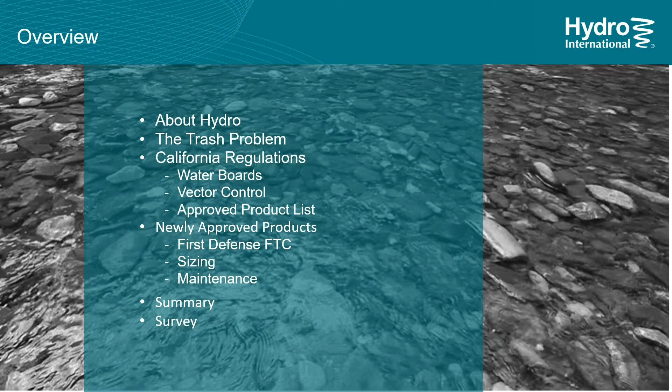So just a brief overview of what I'm going to cover. I'm going to talk about Hydro International, who we are, what we do. We're going to talk about the trash problem in general, and again, those are the slides that maybe you might have seen if you attended the webinar last year. But then we're going to jump specifically into California regulations, what the California Water Board is doing, as well as vector control approved products on their approved list for meeting the trash provisions. I'm going to talk a little bit about our newly approved products that we have with Hydro International with the state of California, about sizing and some of the changes that are being done with the state and how they like to see things sized, and obviously talk about maintenance, because any of these products that we talk about do need to be maintained in order to be functioning properly.

So Hydro International, we're really a water management company. I deal in the stormwater division, but we do have a wastewater division. We also have an industrial division. So if you have any projects that fall under those categories, feel free to get in touch with me. I can put you in touch with my colleague, the appropriate colleague that covers that segment of the industry.

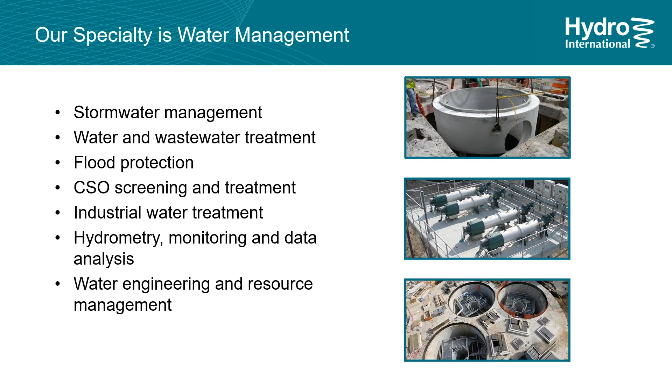We're truly an international company. We have installations all over the world. We have multiple locations of hydro offices as well. Our corporate offices are based in the UK, but for America's Stormwater Division, we're based out of Portland, Maine, and we have our wastewater division all the way across the United States, just outside of Hillsboro, Oregon.

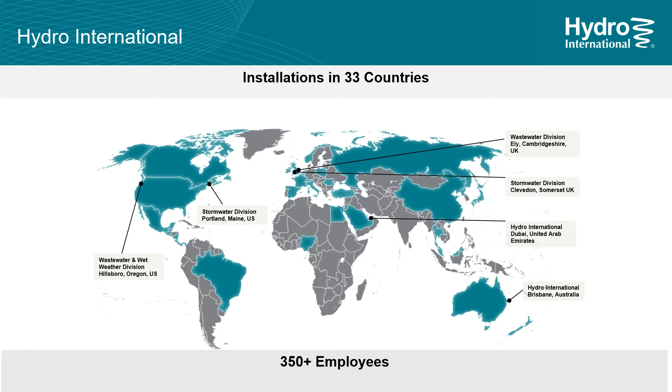One of the things that separates Hydro International from all of the other companies is we're really a water treatment company first, and we develop all of our own technologies in-house. We continue to improve on our products and work in our world-class laboratory to come up with new products and improve on our existing products in order to help you with your water quality needs.

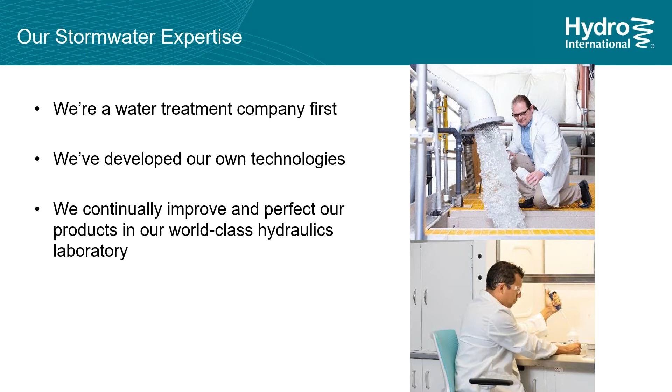We have a vast array of different stormwater devices depending on what your regulatory requirements are and or the pollutants that you're going after. This is just kind of showing you all of them, but specifically today, the pollutant we're going to be talking about is trash.

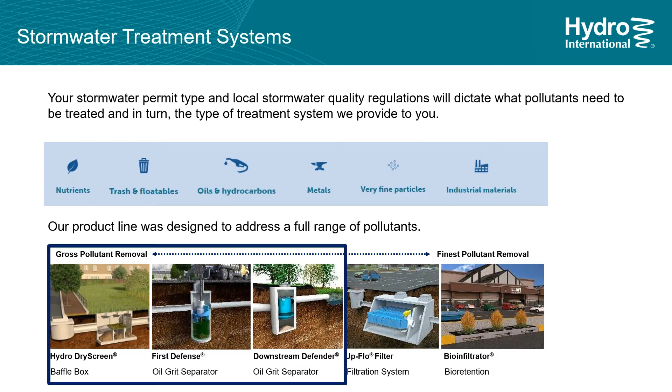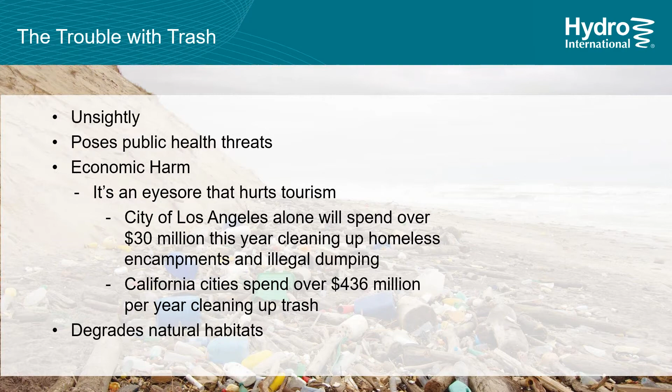Now, these are some of the slides that maybe you'd seen if you joined me for the webinar a year ago on trash, but I just want to go through the problems with trash. Obviously, it's a very unsightly thing. None of us like to see trash on the sides of the roads or in our communities. It can pose public health threats, and obviously it's a huge economic harm to cities and the state. How much does it cost us each year for us to be able to clean up all of that trash? Just an example, last year, the city of Los Angeles spent over $30 million cleaning up homeless encampments. And the state of California, when you combine all cities and their costs, is over $436 million per year in cleaning up the trash.

So it's obviously a very big problem that we do need to address and think about. None of us like to see any of these types of pictures. We know that one of the main things that gets into the ocean is plastics, and everything that we can do to capture trash on land and avoid it from getting into the waterways is obviously going to be a good thing. Some of the not-so-fun facts about trash, and I hate reading these, but it is a problem and it's something to be addressed. We've produced over 18 trillion pounds of plastic since the 1950s. That equals the size of 1 billion elephants, and that's pretty horrific when you think of it that way.

18 billion pounds of trash ends up in the ocean each year, and out of that, 70% of it is actually plastic. And 80% of that trash originates on land. So everything that we can do to capture that trash on land before it gets into waterways, before it gets into the ocean, is obviously the best thing that we can possibly do.

It's estimated that by 2050, there'll be more plastic in the ocean than fish. I'd like to think that all of us can definitely avoid that by doing what the state of California is doing, implementing trash programs to capture it on land and avoid it from getting into the waterways.

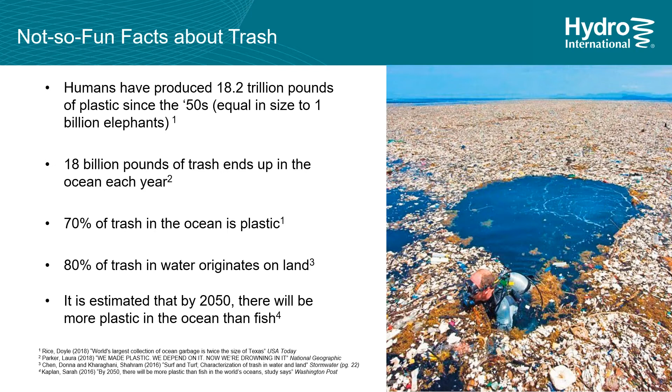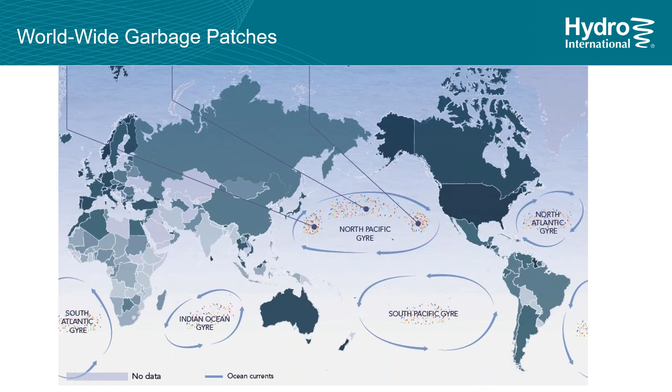Now, we have 5 garbage patches throughout the world that I'm sure you've all heard and read about, but the one we think about here in California is the Great Pacific Garbage Patch between California and Hawaii. That's grown significantly over the years, and at this point it's actually twice the size of Texas.

So it's a significant problem, something that needs to be addressed, something we need to think about in terms of how we're going to clean that up. Luckily, this young man from the Netherlands, Boyan Slat, came up with a pretty brilliant idea for ways we could clean up these garbage patches.

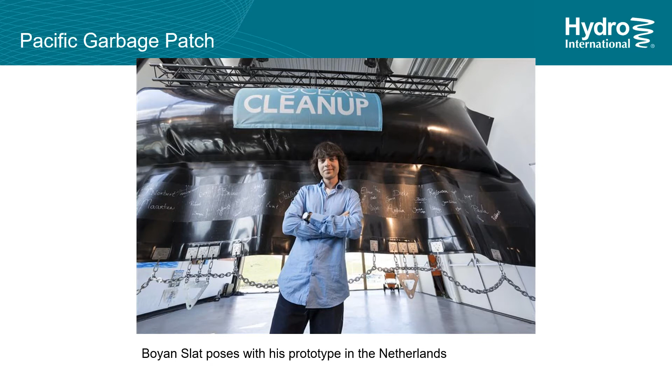You can see his prototype behind him in this picture. It's almost like a big inflated tube with a long hanging skirt underneath it, and you can see the chains and weights holding it down. That's basically to try to corral these large garbage patches and have a way for us to clean it up. But as much as it's a great idea, brilliant for the kid to come up with, there were definitely some problems.

When they launched the deployment of these devices, he had 60 devices at a cost of $360 million. So it's not a cheap proposition. And what looks good on paper might not necessarily be exactly what works in the real world.

When they launched these, they had some failures. They found that the turbulence of the ocean and the winds they get out in the middle of those channels were just too severe for it, and it broke apart.

When they went out after about 3-4 months of it being deployed, they found that a lot of it was broken apart. The other thing they found is that it was designed to move with the currents just like the plastics, but they found the plastics were actually moving faster than his device.

So back to the drawing board they've gone. They're trying to do some tweaks in the design. Hopefully they'll come up with something that can be used to get all that plastic corralled and out of the ocean.

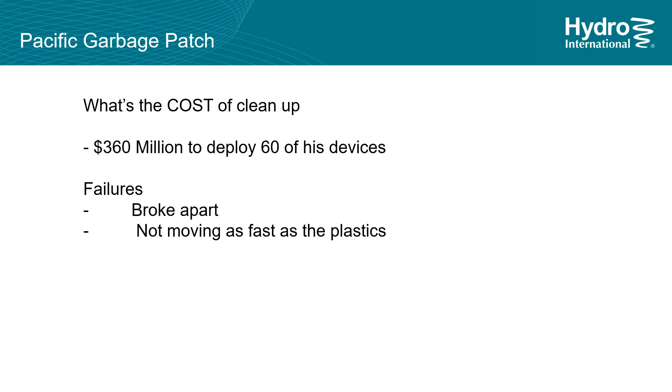So now I'm going to jump in. We talked about the problem of trash, and we're all aware of it, but I'm going to specifically start talking about the California trash provisions. But before I go into it, I wanted to launch a poll to have each of you respond to. Let's see if this launches here.

So the poll is: what percentage of your water quality projects have implemented trash provision requirements? Just on a percentage, if you could indicate how many of you are thinking about trash and how much of it is becoming more prevalent in your design and thought process. I'll give everybody a moment to fill this out so we can see what the results are, and just give it a few more minutes here.

Okay, I'm going to close the poll, and then we're going to share the results here. So it's interesting to see: 25%, less than 25%, 50%, and 75 to 100%.

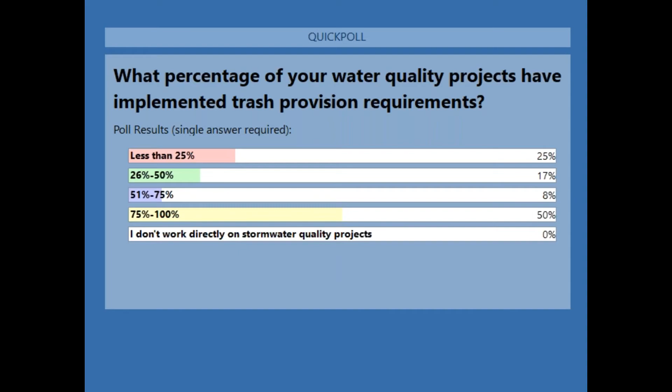That's very interesting to me because I've been doing and talking about trash for about 3 years now, and it seems that when I would do lunch and learn presentations at engineering firms 3 years ago, I would ask this question and pretty much nobody was thinking about it. So this poll really tells me it's becoming more and more on people's minds. People are aware of the new California trash provisions and how that works. Very interesting, I'm glad to see that.

So now we're going to talk about California trash provisions, and based on that poll, I think a lot of you are starting to think about it. A lot of you might be aware of it, but we're going to talk about some of the changes that are happening as things have progressed with this program. So let me get this to advance here. There we go.

Okay, so I'm going to talk about regulatory terminology. From here on out, when we talk about full trash capture, we're going to talk about the trash provisions. That's more really what it is on the state level. One thing not to confuse is TMDLs with full trash capture or the trash provisions by the state water board.

The water boards are generally concerned with basically the first flush event. That's treating the first 1 hour and 1 year storm, and generally it's about a half inch per hour intensity. They know that some trash is going to escape from these systems when they go into bypass mode, but this is not about capturing and holding everything. This is about getting that first flush and meeting the water board requirements.

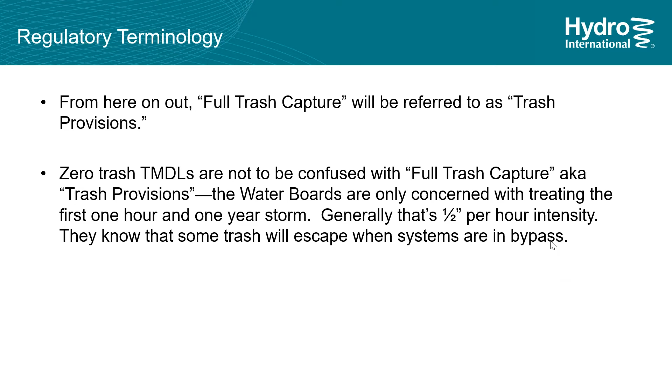This is a timeline for how this trash provision has come about. Back in 2015, new trash amendments were effective, and most municipalities were put on notice that this was coming. Municipalities had to decide which way they were going to go in order to become compliant with the state's trash regulations, picking either track 1 or track 2, which needed to be submitted to the state by December 2018. They don't have to be fully compliant until 2030, but that's when most cities and municipalities started thinking about it and decided which way they were going to go.

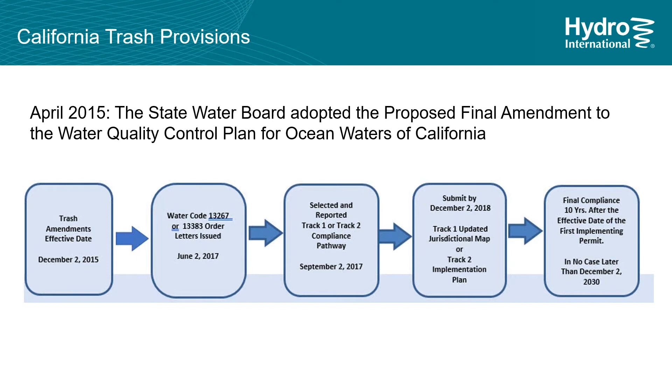When you look at the difference between track 1 and track 2: track 1 is install, operate, and maintain full capture systems for all storm drains that capture runoff from the priority land use in their jurisdictions. That's utilizing full trash capture devices like the ones that Hydro International manufactures. Track 2 is kind of a combination, utilizing catch baskets, inlet filters, maybe our large devices, increasing more men on the street picking up trash, maybe increasing your street sweeping program, that kind of thing. Most municipalities try to figure out what would be most beneficial and cost effective, and they submit that to the state.

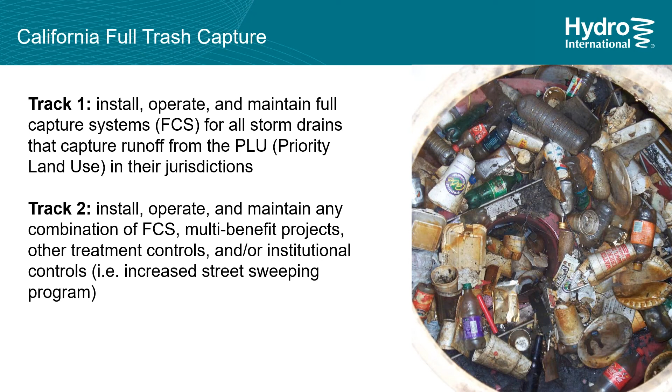Now, when we talk about how this all came about: in the very beginning, when manufacturers filled out an application for their device to be approved by the state, consideration to mosquito and vector control really wasn't done right at the beginning. The state started approving some products without consideration to mosquito and vector control. That's changed drastically. Now, both the state water board and mosquito and vector control are working together for approvals for any devices being applied for. So that's a big change.

We at Hydro International are working very closely with both of them. I'm in contact with vector control, I'm in contact with the state board, and I'm trying to stay on top of all the changes that are happening. As I've told many people, it's somewhat of a moving target right now. Some manufacturers that were grandfathered in and approved way back when might not be approved tomorrow. There are delistings happening off the approved list, so it's very important for you to stay on top of the water board approved list.

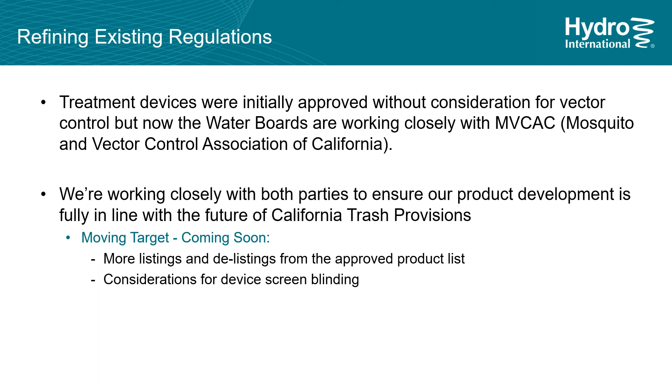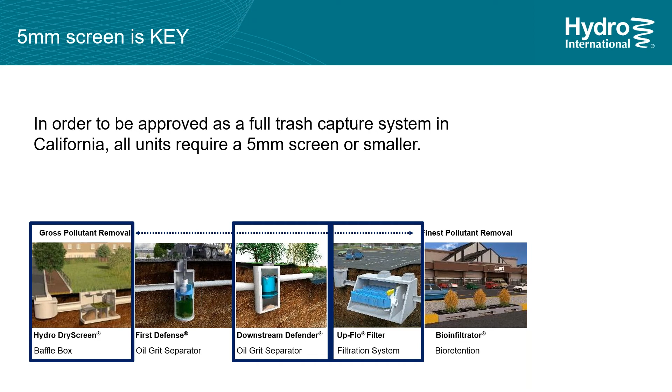The other thing that's changing is they now have considerations for device screen blinding - I'll go into that a bit more - but they're concerned with how these units actually function in the real world once they're not being maintained properly. One of the keys for a product to be approved on the California list is it has to have a 5mm screen. Different devices have different screens, and 5mm is the bare minimum.

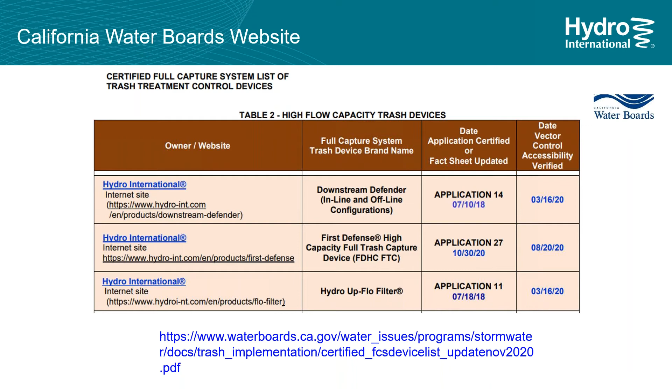Now, if you go to that full list and look at all the other manufacturers, you're going to see quite a number of them with the word 'none' in vector control accessibility. That means they have not gotten vector control approval yet. What the state board is currently doing is sending a letter to each manufacturer that has a 'none' in that category, giving them 60 days to apply to vector control to have their device approved. We'll talk about what vector control does and why that's important. But it's very important for you, when you look at this list, to pay attention to the ones with 'none' next to them, because they might not be on the list in the very near future.

Now, vector control, what they do is they're treating for mosquitoes. The mosquito problem is a big deal. Before I got into understanding all the nuances of these approvals, I wasn't really aware of mosquitoes and how big of a problem it really was. I've learned a lot over the years.

When it comes to approval of a product, it has to be approved by the state, but it also has to be approved by the Mosquito and Vector Control Committee. For approval for vector, it's based on two things: one is treatability and one is accessibility.

In order for the vector people to do their jobs properly and treat for these devices, they don't want to have to climb into a structure and disassemble parts. They don't want to have to lift heavy hatches. They want to be able to pop the manhole lid, look down into the device, and see if there's standing water and mosquitoes, and be able to drop in their pellets to treat the water. So those are the things that are important to them. They don't want to see a device with a big screen blocking their ability to get in and do their job properly.

So when I talk to Vector Control and ask them what their ideal designs are, one is unobstructed access to drop in their tablets.

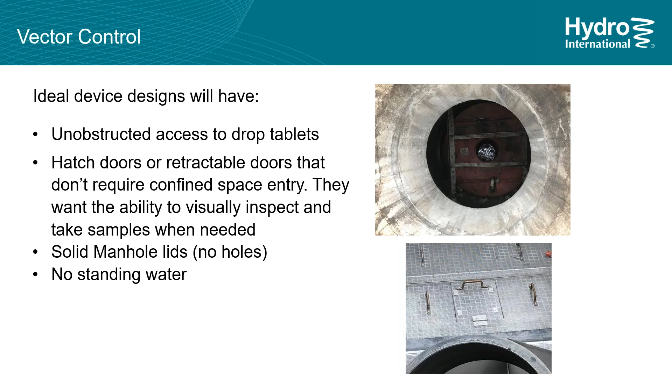Mosquitoes can breed in anything as small as a water bottle cap—that's as little water as they need in order to breed. So they want to have as little standing water as possible.

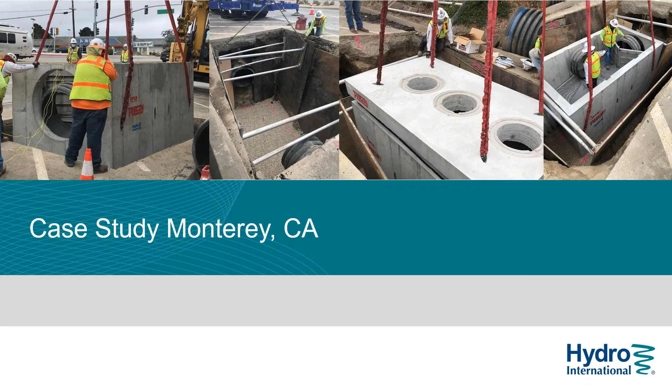This is a case study we did in Monterey. I worked with the city of Monterey for a couple of years helping them decide how they were going to meet California's full trash capture requirements. After analyzing all the different units, they decided to go with the Hydro DryScreen. The reason they went with that is they felt it was a great unit to have only a couple different points of maintenance, while still being able to hold a large amount of trash and debris in one area for one point of maintenance.

I worked closely with them doing drop-in inlet filters for years when I was with another company prior to Hydro. They were considering putting inlet filters all over the city, which would require a whole bunch of different maintenance points and a lot of man hours to maintain all of those.

So what they did with these is they found two low points in the city to where all the water flows to, and they installed these hydro DryScreens. You can see on the left picture there, we retrofitted our existing DryScreen with a 5mm screen. The other thing that we did is we added that hatch. That hatch is for vector control to be able to get in there.

Things have been somewhat of a moving target, and ironically, we had the hydro DryScreen on the approved list for full trash capture with the state, but at the same time as we were having this installed, vector control decided to delist us with this device, not having seen our new design with the hatches. So currently, the hydro DryScreen is not on the approved list, but we are going back and reapplying. This device hopefully will be back on the approved list very soon, because we made the changes that vector control asked for by adding the hatches. So that's what I'm saying about, manufacturers are going to be doing what they can to tweak their existing products to be able to appease the vector control people.

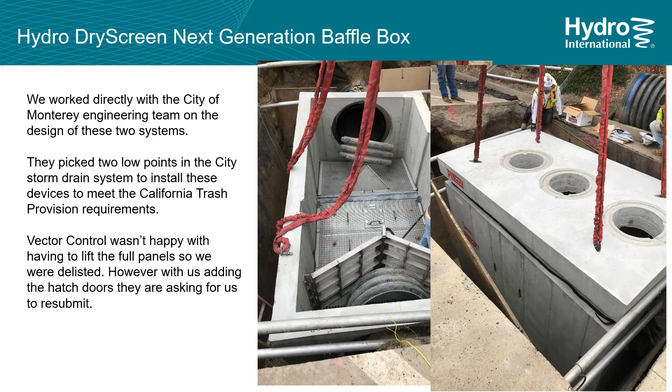So make sure you stay on top of those lists. With Hydro International, we do have some newly approved devices I just wanted to make sure you were aware of.

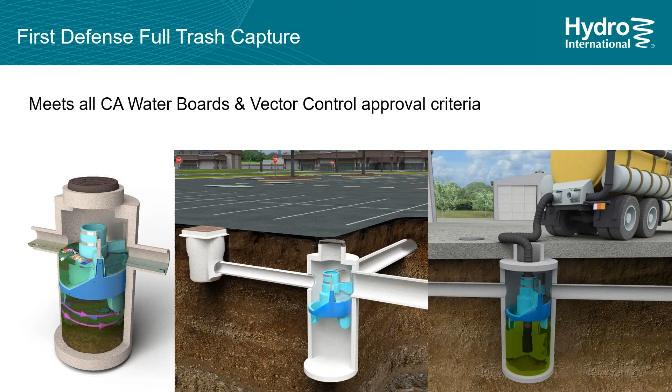Vector control likes this unit, again just like the downstream Defender, because it has that middle open shaft down the middle, so they can easily treat any standing water, and they can easily see anything that might be below.

Now, this is where some of the changes are happening at the state. As a design engineer, when you start thinking about sizing for trash, it's just a different frame of thought than what you've always done in the past, which is generally sizing for TSS removal. So we're not talking about TSS.

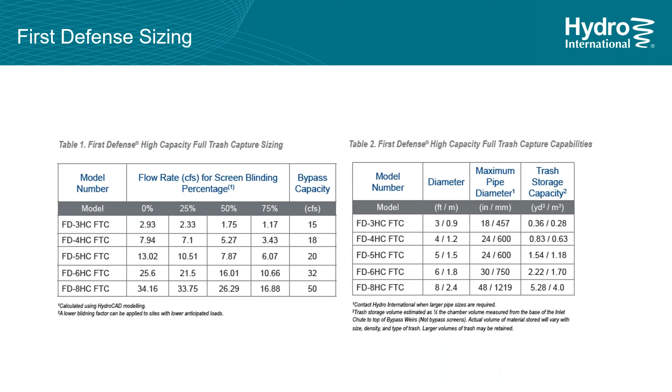As we talked about, performance is affected by the blinding. Obviously, the more that gets in there, the slower it's going to go. And there's definitely some screens that can be designed in such a way that they blind more slowly. We actually have a new product in development right now that hopefully we will be launching later this year that we think is going to be able to provide longer periods between maintenance cycles and allow flows to get through easily, and allow vector to be able to do their job and treat. So we think it's going to be a very good product coming out later this year.

And Hydro International, I mean, we have vast experience with trash and understanding maintenance. We have our own maintenance division.

We maintain any and all BMPs. So at the end of this presentation, if you've got any concerns or questions about the costs of maintaining any BMP you might be specifying, please feel free to reach out to me and I can put you in touch with our maintenance division. But as I said, we understand trash very well.

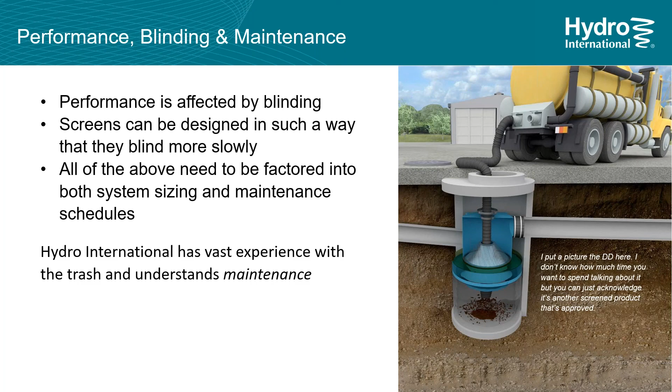We've been doing trash studies for many, many years. This last year, obviously 2020 happened and it didn't allow us to do our normal yearly trash study. But I'm just going to show you some of the trash studies we've done in the past to show you the experience we have with trash.

We based our trash studies on the Friends of Los Angeles River studies and conducted it basically the exact same way they did. We gathered all the trash just like they did, and divided it into 11 different categories to find out what the biggest nuisance pollutants are that we have to deal with. On the right-hand side, that chart is from the California Coastal Cleanup Day, and they used basically the same protocol as the Friends of Los Angeles River, gathering all the trash, dividing it up, and figuring out the biggest nuisance problems.

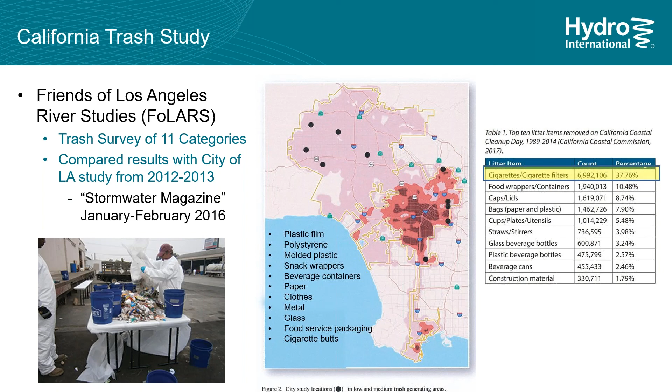As you can see in that chart, number one at 37.76% is cigarette butts, and that's where the 5mm screen comes from—it's able to capture a cigarette butt and larger. About 45% of the rest of those pollutants are food and beverage. We find that very interesting because when you look at some of the studies we did, we found that we mirrored the same thing, even on the other side of the country.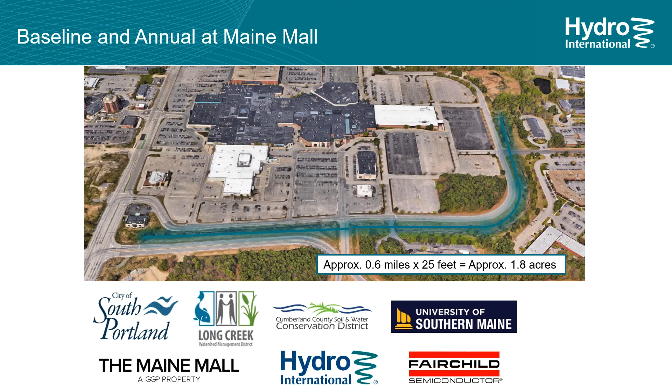This is where we conducted our trash study at Maine Mall in the city of South Portland, in the southeast corner, approximately 1.8 acres of area. This shows all of our staff out there on the cleanup day. This is from 2019—again, we didn't do it this last year—but we had 22 volunteers and collected 261 pounds of trash. We did the same thing the Friends of Los Angeles River and the Coastal Commission did, taking all that trash and dividing it out.

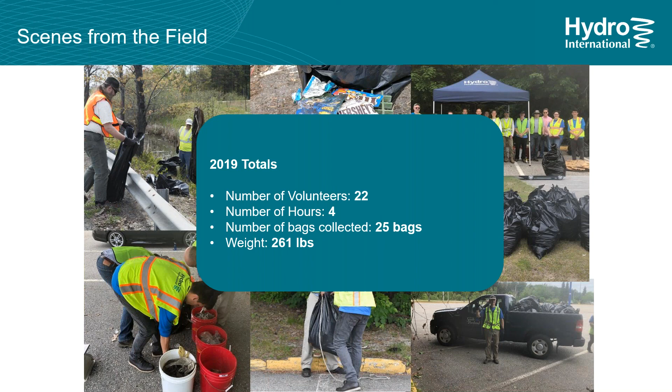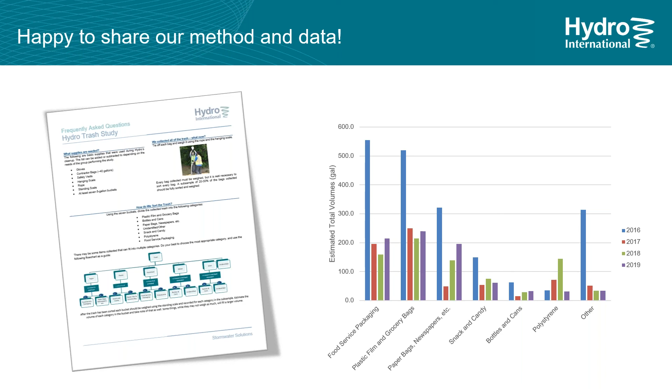You can see we started this back in 2016, that's the first year, the blue line. Probably because that area had never had 22 people go in and clean it up, the numbers are probably so high—it was a heavily polluted area. You can see those numbers drop in most cases as the years go on. But we did find that it mirrored very similarly to the trash study on the West Coast, in that a lot of it is food and beverage. It's just a very, very interesting study.

So just to wrap up this brief webinar, the product requirements for satisfying the California board for full trash capture—you need to also think about vector control. Make sure that any devices you're specifying meet both the water board and vector control approval. Again, if you need that link or have trouble finding it after this webinar, please feel free to send me an email or give me a call. My phone number will pop up at the end here.

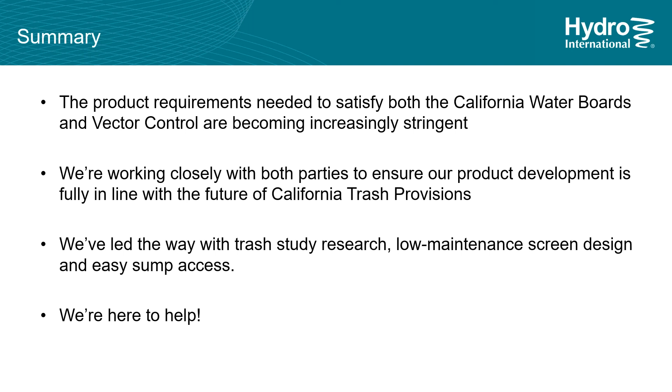Just know that we're working closely with both of those parties, so any changes that happen, I should be well aware of it. I can be a resource to you, so if you have any questions about anything going on with trash, please feel free to reach out to me—I'm here to help in any way I can. And if you have staff who couldn't attend today and you're interested in a virtual lunch and learn, I'm happy to do that as well.